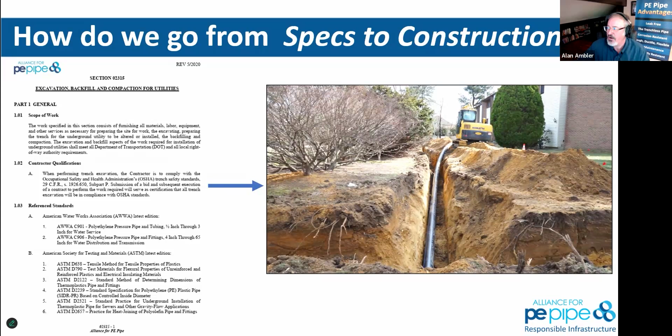And then once they push the pipe into the trench, they'll come back through and put backfill and compact that backfill in the appropriate lifts. A lift becomes less than 12 inches of backfill that can be compacted, because you can't compact typically more than that. So this is how we translate from the text all the way over into the video that you've seen in that scenario. There's a lot of things that we have to address.

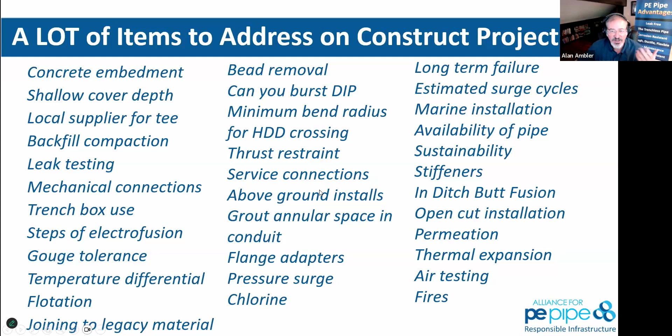Anyone on the call here that's done construction before knows that any number of these items can go potentially wrong in the field, or right, once we've done it long enough and know exactly how to do it in that manner. So how do we take all of the design considerations, the operational parameters of the pipe system that we're putting into place, and then know enough about all of these other things that we have to cover during construction? Again, at the beginning, I said we learn more from failure than we do by success. The second that we have a really big screw up that's going to cost a lot of money, we certainly will not forget about that particular compaction or that trench shoring condition. We'll talk about that a little bit later.

So here is flow design and ID matching. We often get compared to a thinner wall pipe because of our thick wall. This is a theoretically simplistic scenario in which we have one very long pipe, and we're looking at friction loss all across that. It doesn't happen that way in typical potable water distribution systems, collection systems, or force main pumping systems. There's lots of moving parts and pieces with friction losses around bends or corners or other things like that that we have to consider. Stephen?

Absolutely. Yeah, I think this is a really important topic because we keep seeing a lot of misleading information out there. And I think it's really important people understand the hydraulic models that go across this. It's so easy just to say, well, I need a pipe with a certain ID, end of story. Unfortunately, it's not that simple. There's a lot of different things that go into it, and every material needs to be looked at differently on those terms. So all we ask is that you properly look at the attributes of every material and design for their optimum benefits. It comes down to that simple. Let's not oversimplify it to where you're not giving a proper design based on every material property.

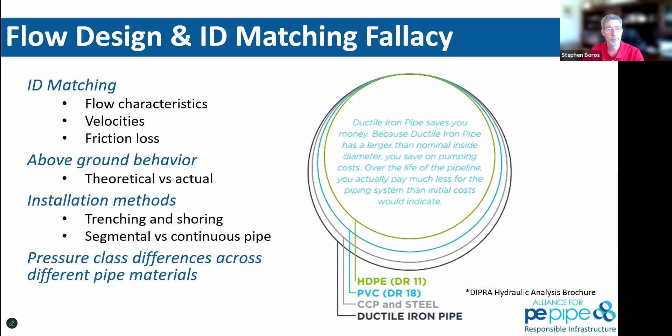That makes sense? Absolutely. Keep going, Steve. All right, we're going to try to answer this question. Keep going. Now I jumped into it now.

But for polyethylene, we have some advantages. Polyethylene is a very smooth interior surface, so you get very smooth flow. You don't get a lot of frictional losses, and it stays that way over the life of the system. That's a very important point. Not all materials do that. So you need to make sure you're sizing your system not just for flow now, but for what flow is going to be in 10, 20, 30, 40, maybe 50 years from now.

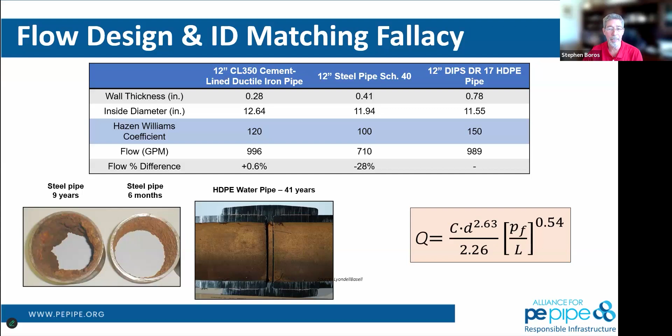Not many piping systems go down in volume need over the years. They always go up. And so how do you get more flow through an older pipe? Well, you got to increase velocity. What happens when you do that? A lot of things you got to take into account when you increase velocity in most of the older systems. With polyethylene, you can increase the velocity, we can get into some of that later on, and not have the other effects that come along with it, especially with an aging system.

So as Alan would say, oh, go ahead. No, you got it.

As Alan was saying, there's a lot of different things that go into hydraulic modeling. This is a typical table you will see out there, 24-inch, 10,000 feet, a little under 2 miles of pipe. Oh, just lost my screen. There we go. And this is what you might see some of the piping organizations put out there. And they say, here's an apples for apples comparison, but unfortunately, it's not always apples for apples. This is a snapshot in time. And there's a lot of other factors that go into it. If it was that simple, engineers wouldn't be doing their job. So there's more to it than just this on a hydraulic model.

The thing I want to bring up there, Stephen, if we can jump back to that slide real quick, Alan. People don't look at this. They look at this at the beginning of the project. But if you look at that C factor later on down the line with ductile iron pipe, steel, any of that stuff, that C factor starts going down over time, whereas polyethylene maintains that C factor through the entire life of that piping.

So as that buildup and tuberculation starts happening in there, your flow rate's going to go down. And that's why Stephen's saying that you have to design that system for 50 years out, because the tuberculation and the buildup inside that pipe is gonna take the ID of that pipe down, so you're gonna get less flow over time.

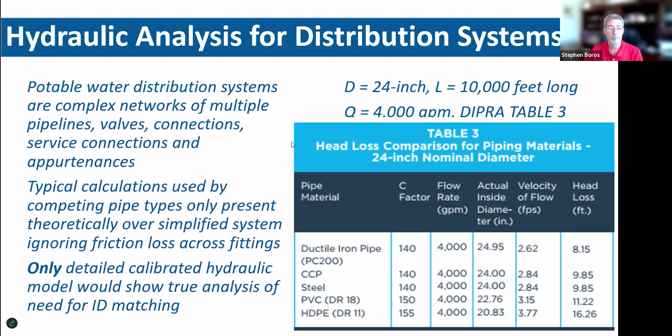And then, of course, we have pipe. We're a pipe manufacturer. We like pipe, but we know that pipe does not make a piping system. You need all the other components that go with it. So you got to have all the valves, the fittings, changing of angles in many cases. So you got to have the 11s, the 22.5s, 45s, 90s, the T's, the elbows, the Y's. They all add frictional forces to the system and are going to play as large or maybe even a larger part of the flow models of any piping system. So don't get stuck looking at just one part of it; make sure you're taking them all into account.

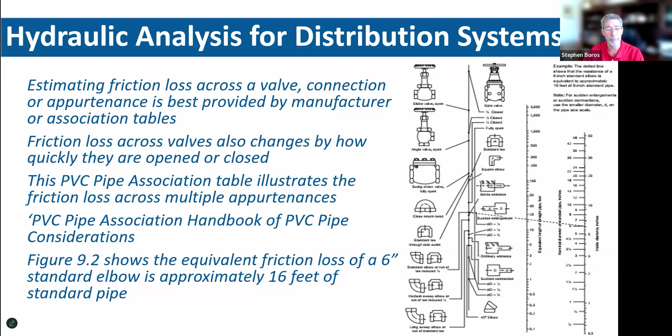So the one thing about polyethylene, though, is you look at these hydraulic models, and Alan's really good on this one here, showing the differences. With polyethylene, there's a lot of fittings you don't need that you need for other things. 11.25 and 22.5 degree bends are really very rarely needed in a polyethylene piping system because it has the flexibility to deflect around those if you have the proper amount of right of way. It does have a very tight bend radius compared to other products. So you can eliminate many of those, as we saw in some of the opening videos on these canal enclosures.

I remember talking with Mr. Toy on that earlier on, and he was very skeptical that he would be able to eliminate those fittings. But you saw here how successful he was. So that can't always be the case with other legacy materials. So again, it's not always a clear apples for apples comparison. Would you say that's true, Alan?

Absolutely. And a lot of these slides are trying to set up an ID matching argument that is only really answerable by a complicated hydraulic model that is included for the distribution systems. We've had a couple of questions with people coming out swinging hard on some of these questions, and I love it because it shows us the caliber of the audience that we're really talking to. A lot of times we learn just as much from you as we try to teach.

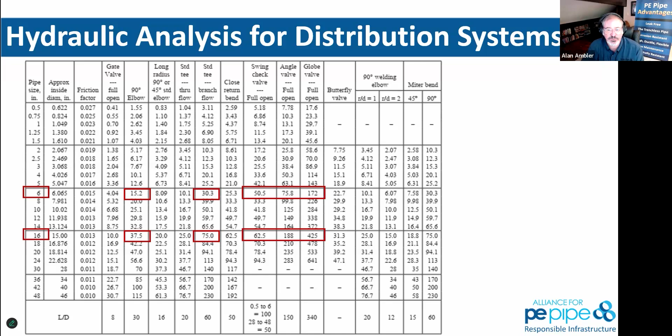We've got a really good question about the C factor over time and whether or not there is a slime layer within any type of pipe that builds up. And how do we translate from the paper, if the C factor of 150 came from a lab, as could be indicated by the question, what does it really mean in the field? We don't know that until we have an extensive hydraulic model. A couple of the next slides we'll go through to talk about some of that, and then I'll give a real world example of how much water flow comes through a fire hydrant, and is it ample enough to do fire protection.

So in complicated hydraulic models, you've seen some of those valves, the impact from that table. Here we look at each node. Each node becomes an actual service connection, an actual valve, an actual bend, something of that nature. And then we have to model the friction loss along that particular function. It's actually rather challenging to take a complicated distribution system, 215 miles, 115 miles, whatever it might be, and model each segment and node with the actual flow. Once that hydraulic model is put together, you also have to calibrate it, and you do that by taking measurements out in the field.

We had the blessing to interact live with St. Petersburg at a recent roadshow, and that crew loved high-density polyethylene for a lot of the benefits we've already talked about, but put a 6-inch pipe out to a fire hydrant, and one of their engineering staff said there's no way that would provide ample fire flow from the constricted ID. They took actual flow meter readings from the fire hydrant to prove that it was providing enough fire flow. And still, we're having some pushback from the engineers. So it is not as simple as one pipe ID, not as simple as an assumed C factor, as one of the questioners pointed out.

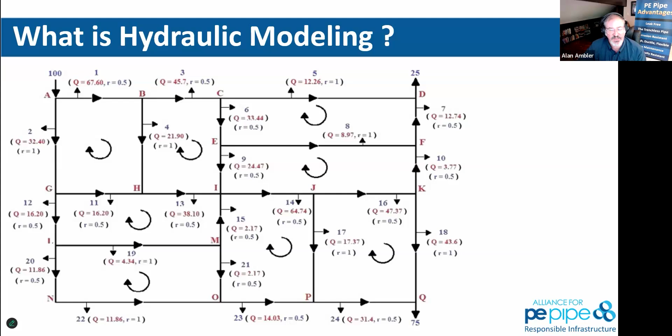Now, over time, some of the metallic pipes will corrode. They will have tuberculation within them. You'll also have some biomass and other things that may very well degrade that. But thermoplastics typically do not degrade in that fashion over time. Now, that's about all we're going to have for ID matching because there's a lot of other things involved here. So keep going, guys. You're doing great.

Yeah, there's a lot. So here I'll talk about this, Chris. We'll hit the engineering part and then the actual part. How about that? So you look at the handbook calculations. Calculating thermal expansion coefficients is very straightforward. They're all established. You have a certain delta T, you get a certain delta L, depending on the type of material. That's theoretical. As engineers, we have to look at what that potential might be, but we also know that in the field, it's going to be a whole lot less. This looks at totally unrestrained thermal expansion and instantaneous changes in the material, and we don't see that in real practice, especially in a buried piping system.

You rarely see anything like that. Any type of changes are going to be very slow, can occur over hours, if not days or weeks sometimes, depending on seasonal changes. And these theoretical changes that you calculate will never come to fruition. But again, you can't ignore them. You got to take a look at them and make sure they're taken into account. What do you think about that, Chris?

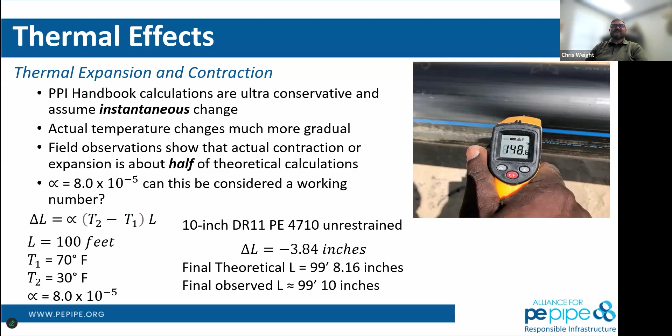Yeah, I mean, to simplify what Stephen just said, we just get into the 1-10-100 rule. If it's above ground, unrestrained, you're going to get 1 inch of expansion or contraction per 10-degree temperature change per 100 lineal feet of pipe. And that doesn't matter whether it's 2-inch pipe or whether it's 65-inch pipe. That calculation goes across the board. It's going to extend longitudinally and latitudinally.

So you need to look at all of that, especially if you're doing an above ground situation, doing tie-ins at the end of the line, so on and so forth. Make sure your weather conditions are there to go with that. And I'll let Stephen get into the modulus of elasticity here a little more because he talks about it better than I do. One of my favorite properties.

The modulus of elasticity for plastics. Took me a long time to understand this, because we're never really taught this in school, right? We're not taught how you model or look at properties of viscoelastic materials. Steel, concrete, wood, all those have very finite properties. So for polyethylene, the established elastic modulus is 150,000 PSI. That's under certain temperatures, certain conditions. So we use that as a basis for our models, such as our example here.

As Chris said, the size of the pipe really doesn't matter. It's going to be the same length of expansion or contraction. And that 150,000 modulus is a short-term modulus. That's something that happens over a couple of minutes. If it's a slower strain rate, if you will, or a slower reaction that takes place, slower delta T, that modulus is going to become lower, and the effect of that modulus is going to be reduced.

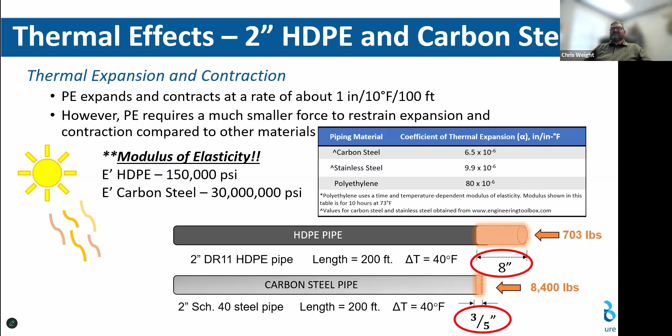Absolutely. Them numbers down there don't lie, and the amount of force that you get out of the carbon pipes compared to the thermoplastics is crazy. How easy it is to restrain polyethylene pipe. Correct.

So again, you look at the theory. The theory gives you a very simple equation: delta L equals the thermal expansion coefficient times delta T times your overall length. It is independent of size or DR, and the force will then be dependent on the cross-sectional area, of course. So the bigger pipe you have, the more force will be generated, as it would with any material.

Let's go from the 2-inch to the 10-inch example. 10-inch DR11 polyethylene pipe is going to want to move theoretically as much as 8 inches. In practice, it's going to be much less than that. But again, you only need 14,000 pounds of anchoring force to resist that. That can be done easily with an anchor block, with flex restraints and soils, things like that, versus almost 200,000 pounds of force that same steel pipe's going to generate. Can you imagine the size of anchor block it's going to take to resist that type of movement versus polyethylene? It's just not the same effect.

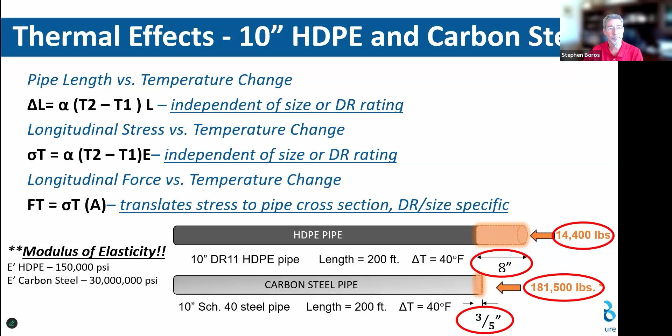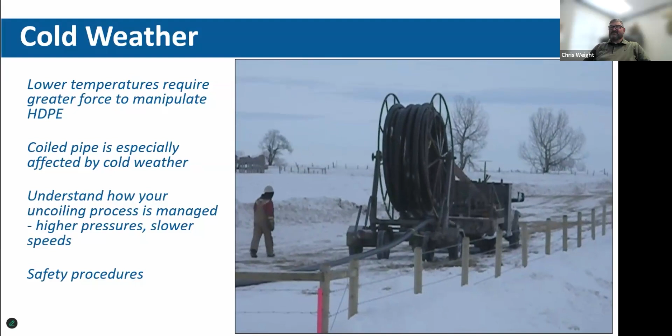All right, here's where I'll take over for Stephen here. These guys are pulling out 4-inch DR7 pipe. The thing with cold weather is coiled pipe especially gets affected by the cold weather. It can be dangerous if you're not careful. Don't stand anywhere where that can come around.

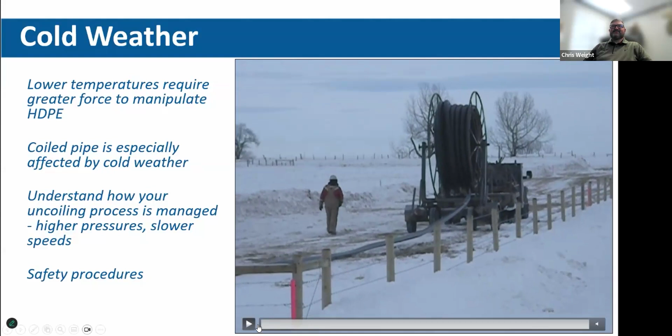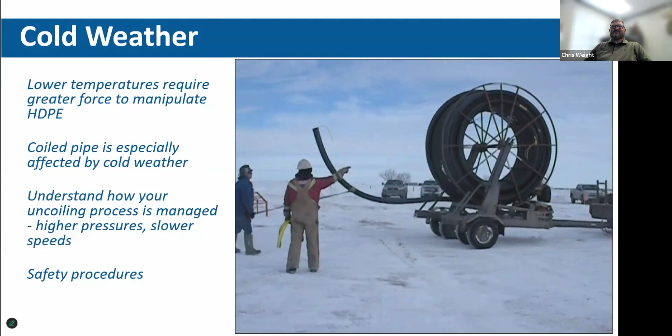The biggest thing that I'm going to point out in cold weather, and we're going to go through a few slides of cold weather here, is change the conditions, do not change your procedure. Understand what's going to go on. This pipe stores kinetic energy. You can see when they cut that first band, it just started popping down there. It'll roll out flat, but it is going to have some kinetic energy. So you've got to go nice and slow with it, get it strung out there, and it will lay and relax over time.

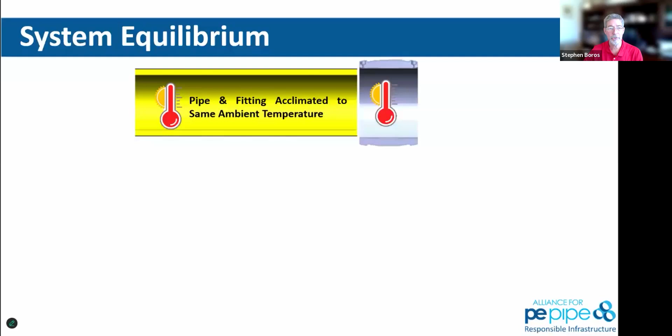Yeah, even in these cold conditions, the stiffness is going to be higher. Modulus is going to be higher. Go back to that term. But again, it will relax back to its manufactured shape, which is straight.

Yes. So be sure that you're equalizing the system and getting the system equilibrium correct. You want your pipe and your fittings to be the same ambient temperature. You don't want pipe higher than the fitting, you don't want the fitting higher than the pipe. Make sure, especially when you're fusing that stuff, that everything's the same. That way you get the proper melt bead on both sides. You're not getting too big of a melt bead on one side than the other. That's going to make your fusion process a lot easier.

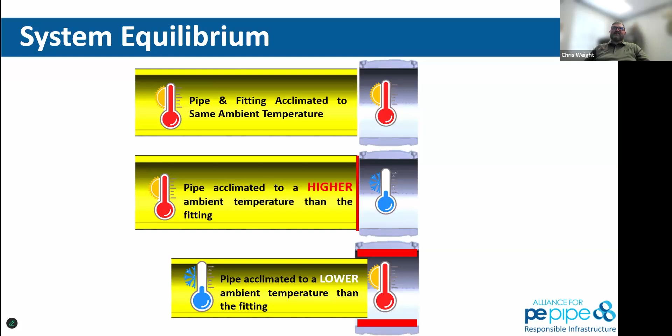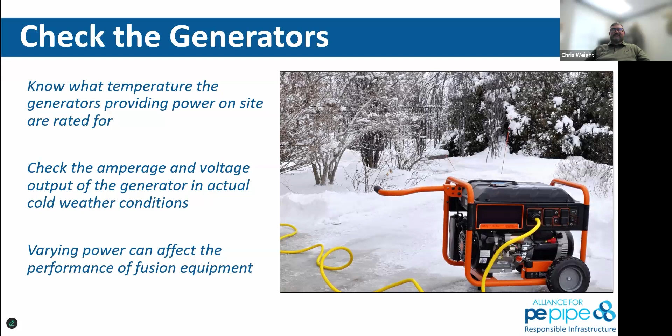Yeah, that's a good field pro tip right there. Generators, and you would be amazed how many people in the field underpower what they're doing. Cold weather affects it, elevation affects the generator output. Be sure you're checking your generator voltage output before you plug your fusion machine into it. Make sure you've got enough power coming from the generator to sufficiently supply your heater, your facer, the hydraulics and all of that on your fusion machine, because if you underpower those, you're not going to do anything besides tear the machine up over time.

And this is a key, especially in the field, using the right tool for the right job. On the left, we've got the poly porter stand where they've got rollers on it. They can prop the pipe up, get it in the machine, keep the alignment. They should be cleaning that pipe back 4 to 6 feet, keep any moisture out of there. Even the lower rollers on the right-hand side do the same thing, just to keep your pipe aligned. You're going to tent your areas, whatever you've got to do to make sure that everything is protected and you're not getting snow and ice and rain in there.

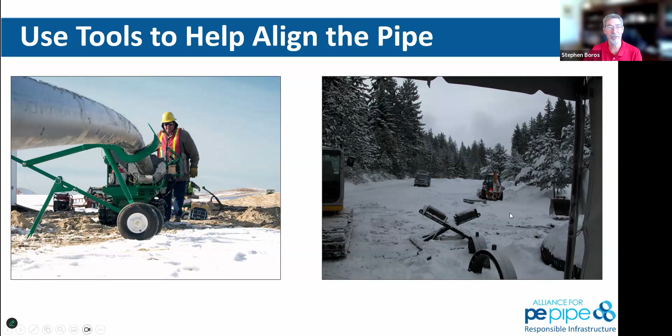But it's not just cold weather that you need to be doing this. You need to do this in hot weather too. Shield your fusion area; in windy areas, you've got to put tarps up, keep the dirt and the dust from blowing in, keep the sun off the pipe. Well, I've been on projects where I've seen the surface temperature of the pipe reaching 165 degrees. It's miserable for a fusion machine operator to stand there around a 450-degree heater plus 165-degree pipe. It doesn't say that in the textbook anywhere. It does not.

Stephen, you want to touch base on this? Yeah, so back to the thermal expansion contraction coefficient. This is mainly for above ground systems, which polyethylene is used for very frequently, whether it's a temporary line or a permanent line. The carbon black in there will protect it from UV degradation for 50 plus years, so that's not going to be an issue. That's why polyethylene is used above ground so much. But because it's black, it gets a little bit warmer than ambient conditions, as Chris said earlier.

So there are ways to constrain it. When you do get these temperature fluctuations, day to night, sun to shade, whatever it might be, there's a number of different ways to constrain that. You can constrain lateral deflection with expansion loops. You can do an anchored system; you can anchor it on both ends and it won't move. You can do a conventional expansion loop, as you see in the bottom figure; that'll work just fine.

The pictures you see here are very common. This is more of a field thing. We don't show that in our graphics, but in the field, throw a couple of Jersey barriers up there, throw some dirt over it every now and then, and that works as a very good restraining system in the field as well. The polyethylene could move on you through these cycles.

So as long as you have the proper right of way and you know where you want to keep the pipe from going, it's very easy to keep it from going in that direction. We're seeing right now, just from morning to afternoon in Wyoming, 40 to 50-degree temperature changes. It may be 25 in the morning and we're hitting 75, almost 80 degrees in the afternoon. So you're going to see a ton of this going on when these guys are laying their right of ways out, especially up north. You're not going to see it as much in the south, but you'll see it in the north where these guys are laying it out.

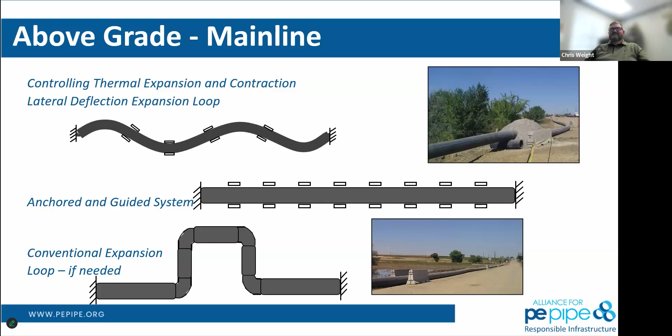So there are calculators for this. So let's say you want to know how many blocks do I need? How many places do I need restraints? Is it 50-foot intervals, 100-foot intervals? What's going to happen at these things? How much deflection will I get? The calculations are all there. All these can be done within the hdpeapp.com calculator, polyethylene pipe calculator, which takes it straight from the PPI handbook.

And you can see an example here. I mean, you kind of think, well, is that really going to deflect 48 inches? And yeah, it will, theoretically. Will it be that much in actuality? Probably not, but you're only looking at a strain of less than 0.5% over this. So it's not going to hurt the polyethylene at all, as long as you properly identify it and properly put your supports where they need to be to keep the pipe from moving one direction or the other during these cyclic thermal temperature cycles.

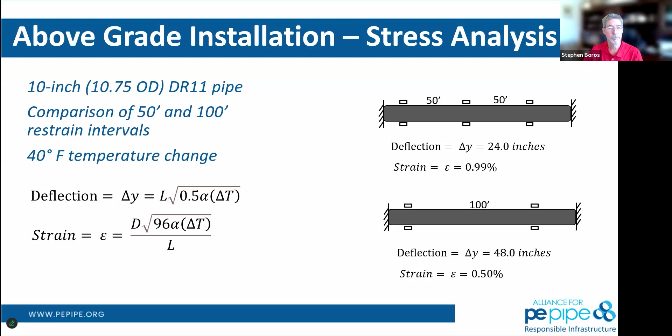Here's how Chris does it in the field. Absolutely. We'll just loop it around. We've generally got a right of way set up where we can string that pipe out. We can deal with the expansion and contraction. And a lot of times we're not gonna have more fused up than we can install in a day. So that makes a difference there too.

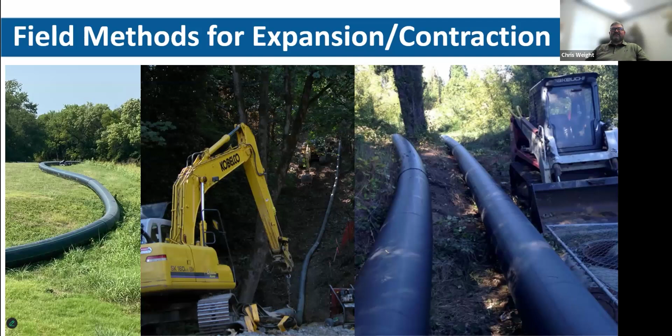So a lot of our locations, we can't keep open trench on, so we have to have the trenching closed every night. And so we get enough out there, but you'll see some of this snaking like the picture on the left out on the right of way while you're doing it throughout the day, especially with these 40 and 50 degree temperature swings.

I mean, yeah, these are some great examples of what people do above ground with polyethylene. I see a lot of engineers who aren't familiar with this get very concerned about it. They're like, wow, this is so much more expansion, contraction, movement than I'm used to working with. And they say, well, what's going to happen under these conditions? And you can see it's really not that unusual.

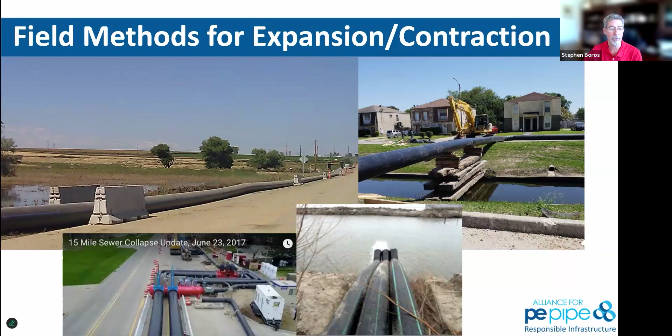In-ditch butt fusion, one of my favorite things to not do. But it's a needed necessity in what we got going on.

I was gonna say, I'll tell you all day long. Oh yeah, you could do that. Absolutely. Call up Chris. He could take care of that for you. Stephen will tell you you can do it. I will tell you we can do it, but it's not the easiest thing to do in the world. You can do it.

Yeah, absolutely. There's a lot of moving parts when it comes to an in-ditch butt fusion. You got to make sure you got the proper fusion machine. You got to make sure your trenching and shoring is right. Steve and I are gonna talk a lot about trenching and shoring today because it is very imperative that you have a proper trench based off your soil conditions. Whether you got a trench box, or if you don't have a trench box, it's got to be sloped out there. It's got to be benched.

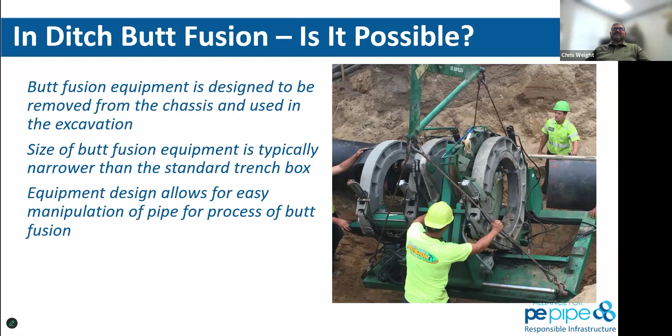However, you got to do it safely. We're getting too many calls nowadays of trench cave-ins, burying fusion equipment, burying people. Fusion equipment's replaceable, people are not. So make sure when you're doing in-ditch butt fusion that you're analyzing the situation. Stop and think about everything and make sure that you're setting the job up properly, because that's going to make the job in the end go way smoother.

Yeah, this is great because it goes to the constructability aspect, and that's true of any project. No matter what material you're using, you need to take a look at what do you have, what type of materials you're using, what type of equipment are you going to need or have on the job site, and how do I properly construct for that?

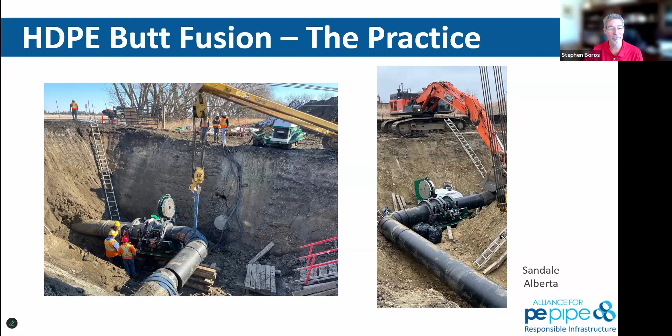This appears to be a gas project that we've got this picture on, but if this was a water project, they'll fuse these 500 foot sections up and they'll pre-test them and chlorinate them right there above the surface. That way they know what's going on. Everything's pressure tested and ready to go. The one on the right is just another little simple in-ditch fusion where they're going to do a tie in there.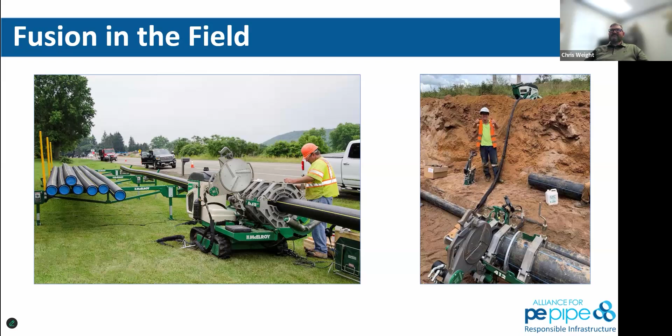So again, the question, in-ditch butt fusion, is it possible? It is 100% possible, given the proper condition. You have to make sure that you have enough room. That picture on the left where they've got trench boxes in there, trench boxes make it more difficult, but it makes it obtainable. You can't just throw a trench box in anywhere. You've got to set everything up in the width of the trench box to be able to get that fusion machine down in there. If you can't get that jaw set down in there and swing the heater and the facer out of the way properly, it's going to create a nightmare in the end and a very unsafe work situation.

So we've seen several images here, fella. Sorry to interject there, Stephen.

Yep, you're good. All of this equipment is designed to come off of the chassis and then come down into the excavation. All of the trench shoring and various levels, now we're getting into increased complexity based on depth and based on width and things like that. They're designed not for the pipe, but to be able to give safe access for the people that are working around that excavation. And you'll see a lot of that through this. If we were just looking at pipe, you wouldn't have to have that wide of a ditch. In an earlier video, we just showed someone rolling a pipe over into a very narrow ditch through that process.

But all of these that we're showing you are also safe for the people that are excavating it. We don't typically like to delve into OSHA that much, but we do really get into a lot of: can we butt fuse in the excavation? And here we're walking through the whole steps. And like everything that we do, we've got to make sure that it's safe, and then also that we're doing it properly.

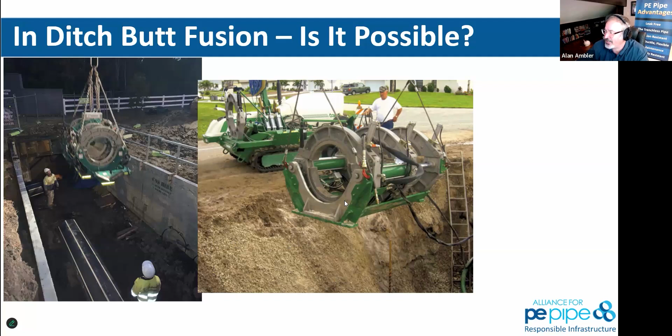There's a lot of very bright people that have thought about the design of the equipment. And there's a lot of very bright people like Chris on that side that have figured out how to actually do that in the field to make what Stephen wants happen, or the other way. So definitely keep that going, guys. Absolutely.

Yeah, I think these are great examples because when you're designing these systems and you have a narrow right of way, you're saying, oh, polyethylene won't work because I can't get that fusion machine down in the ditch. The whole fusion machine doesn't have to go in the ditch. When Chris is there, he'll say, man, it's really nice when it does, but they are designed segmented that way.

So the collets and the gripping portion, heating portion can be lowered in separately. So when you're looking at the size that's needed, it's not the whole size of the fusion machine that has to go in there. It's just a portion of it. So just make sure that's taken into account when you're doing your construction aspect of the project.

Yeah, the picture of that fusion machine that's on the slide right now, you can break that down into a 3-jaw system where that's all you have in there, and it's just the width from the back of the jaw to the front of the jaw and the controls. That heater and that facer can be set down with an excavator or a piece of equipment, lowered into the machine and taken back up out of the machine, and it can actually stay up out of the trench if need be.

So if you've got questions on that, you can always reach out to us to get some dimensions of a fusion machine and actually how small you can be. But there's a lot of great resources out there. McElroy's website is amazing for stuff like that. Yeah, I just want to make sure we pointed that out because I get those questions a lot.

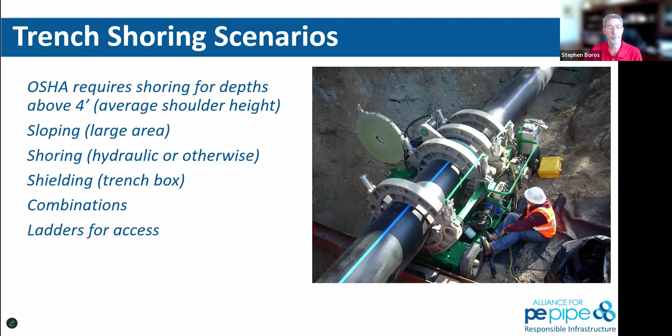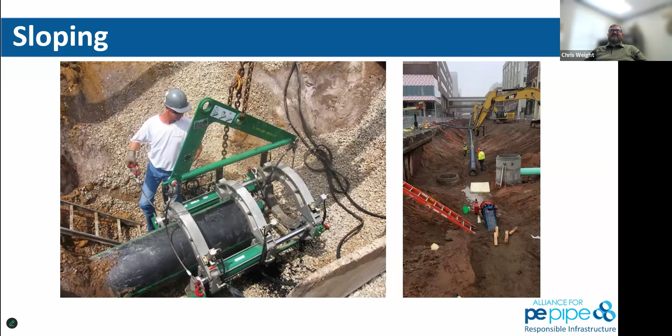So I'm going to let Stephen talk about the hydraulic trench shoring here, because I'm not real familiar with the hydraulic side, because I've never had to do that one. I can also help some here too. Yeah, so jump in there, Alan. Yeah, you bet. So these slides are set up to walk you through from a simple solution, which is the sloping, all the way up through the much more complicated, expensive slide rail system. For each of these excavations, the cost of excavation also jumps up in similar manner.

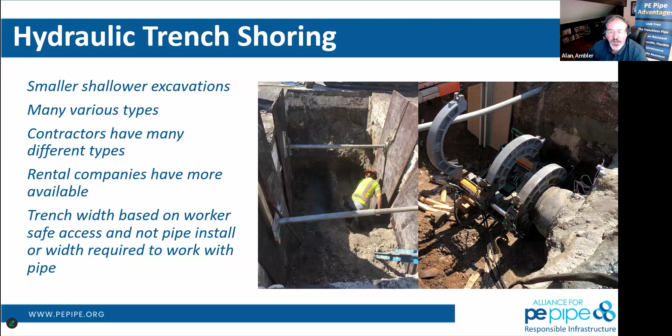So these hydraulic trench shoring systems basically operate against a plate, and then whoever's operating it pushes out a hydraulic piece in order to be able to expand that and to try to keep a simple and quick excavation from moving in that manner as well.

Shielding is the next level up as we go through this. This could be a trench box that's all set up, and you simply move that into the excavation and put it down. Again, all of these are not for the pipe. They're all for safe access of the people working on the pipe, and their widths are determined in that manner to be able to provide us that. A lot of contractors will have these on site or be renting any number of things.

So one of the big things about polyethylene that Chris talked about was very long lengths. A lot of times we get segmental contractors that look at HDPE pipe and go, oh, but I can only install this amount at one time. And like, no, rent another trench box, rent yet another trench box. And that way you open it all up, you put in the high productivity of that 500 feet at one time, and then you cover it back up in order to be able to increase your productivity. You just use more rented trench boxes in that manner.

But the point that I want to touch base on that with you, Alan, is people look at that and they're like, well, I need 500 feet of trench box. You don't need 500 feet of trench box. You need enough trench box to keep that trench safe, just in case somebody has to get down in that trench. So it may only be 1, 2, maybe 3 trench boxes. Obviously, the deeper it goes, the more expensive the trench boxes get, and the engineering and stuff like that. But that's a thing to keep in mind.

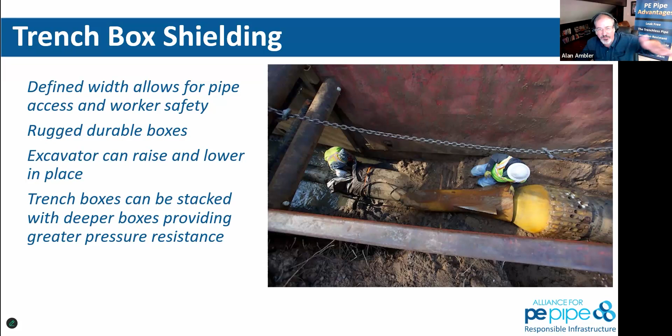You can open up all 500 feet of ditch, but you only have to keep enough of it safe at that point for the person to get down into that area to do what they have to do and then get back out. So you don't need 500 feet of trench boxes. Absolutely. Correct. The allowable bending radius of HDPE will certainly allow you to move that pipe from above ground into place in a much easier fashion as well as we go through it.

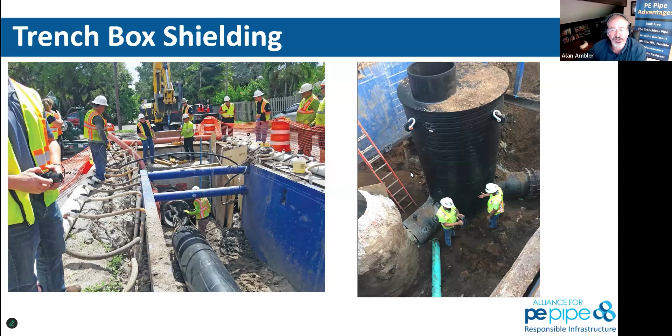So I'll just kind of push through a couple more examples of this as we're looking at it. And this picture on the left shows a dewatering system as well through that process. So in high groundwater areas, we're going to have to make sure we lower that groundwater to be able to have a safe trench through that excavation process. And again, as Chris weighed in there, pun intended, with your last name there, Chris, you can easily put whatever you need in there and then move that trench box to the next spot as we're going through. And even with deep excavations, like you'll see through the manhole on the right here, there are trench systems available for you to be able to go through.

Moving into a more expensive version for deeper excavations, now we have a slide rail system. Now, our dewatering system only works down to about 15 or 16 feet in most scenarios. You'd have to have a staged dewatering system to get even deeper than that if we have that much groundwater present and we need the bottom of that excavation to go through. But still, that's independent of the machines. That's independent of the HDPE pipe. Now we're talking about construction logistics that sometimes we think through or sometimes we don't as that design engineer moves on and Chris takes over the project to actually construct it.

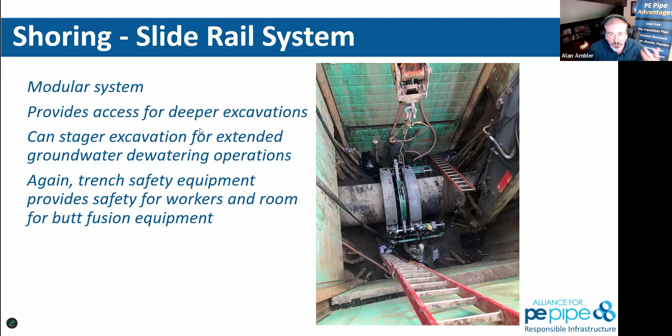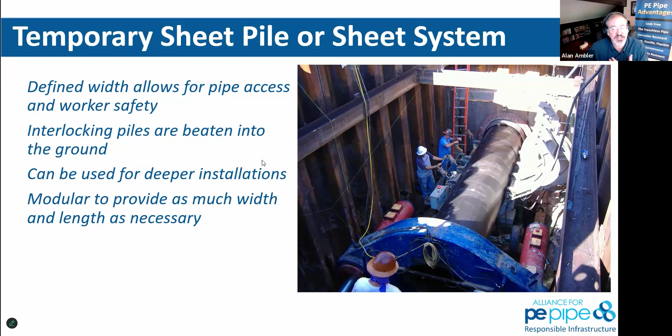Here's a much more costly system for trench shoring, and that's a temporary sheet pile or a sheet system. And these simply are beat into the ground to provide that safe access for us as we go through. We often talk about a compression fit slip lining or a pipe bursting process through the installation of a trenchless method of HDPE, and that soil interface from that machinery that we're using either for pipe bursting or compression fit slip lining would push against a sheet pile like this. And then that sheet pile would provide that reinforcement to be able to resist the force from moving in that direction. But you could see also from the picture that they're really providing protection for the employees to access the actual work location.

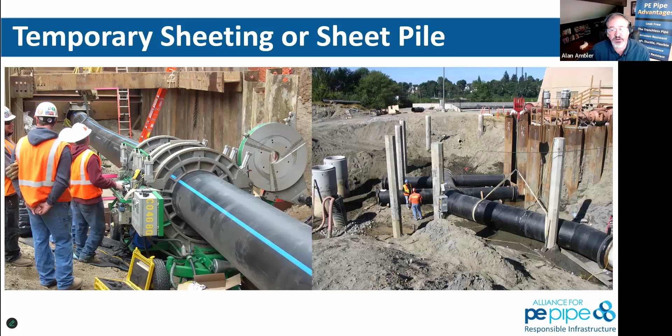These vary based upon how much work area is actually there, what needs to be protected, and can work in conjunction with other methods as well. As you'll see on the right here, there's a lot going on in that picture with sheet pile, sloping, and a few other things of that manner. So here's a little bit on open cut installation. So essentially, flexible pipes are considered to be ductile iron, PVC, and HDPE.

Those are all installed in the same manner. They're all considered to be flexible, as they're working with the soil that surrounds that pipe to distribute the force loads to the soil surrounding it. Rigid pipes are cast iron, asbestos, VCP. They're expected for that hoop strength to be strong enough to take any of the external loading and just go straight down to the bottom.

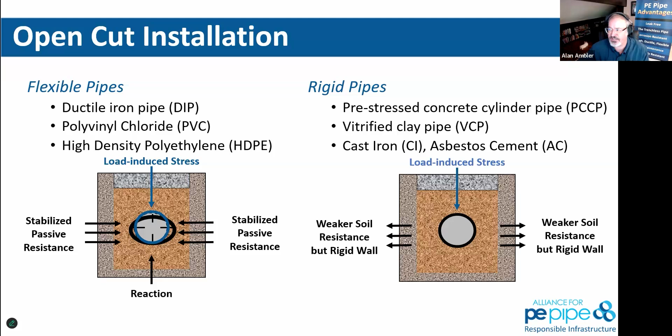This is a great slide. I like that slide, Alan, because I get this question a lot: people feel like polyethylene won't be able to withstand soil forces, and it's the exact same principles, exact same calculations as you would have for ductile iron or PVC that work for polyethylene. Even with live loads, if you have 2 or even 3 feet of soil cover, your live loads become very minimal, and you don't have to worry about it.

And the other side is, if you have 25 feet deep burials, again, with proper soil compaction and soil support, you don't have to worry about those either. So there's a broad range where you can use polyethylene in these situations. Don't be worried about it. All the calculations are there. Look at deflections. Because it is flexible, polyethylene doesn't have the strain limitations that some other materials would have before they become damaged or compromised. So again, a pretty broad range of installation conditions where you don't have to worry about it whatsoever.

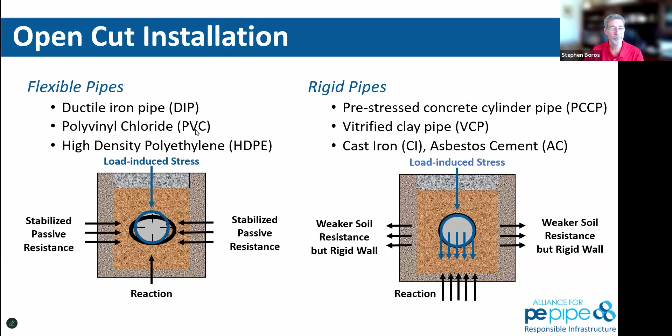Now, the next slide, this is one of my favorite things. I absolutely hate comparing polyethylene to silly putty. It's really not the same thing, but it does give a good comparison of what we're talking about when we use the term viscoelastic. We've all played with a piece of silly putty over our lifetimes, maybe not so much now. In my day, you did. You know that it's strain rate dependent, right?

So you take a piece of silly putty and you stretch it slowly. It just goes and goes and deforms, and its elongation is huge. Conversely, you do a very high strain rate, and it doesn't stretch much at all before it breaks. Very little deformation. That's the classical explanation of viscoelastic. Its different properties are strain rate dependent. All of this has been defined for polyethylene. Very well understood, very well known.

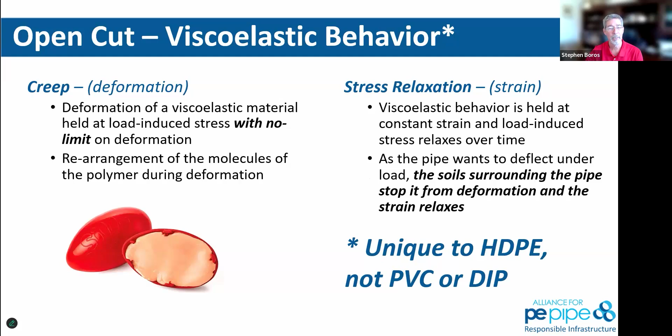All the design calculations we use, whether it's long-term strength, short-term strength, surge pressure, cyclic fatigue, all of that has been factored into how this performs in that unique manner. Sometimes we can take advantage of it. Sometimes we have to treat it as a negative and still account for it and properly design with it, and it works just fine.

As the opener for the video told us, one of the users of this pipe material essentially just bends it in the field. And that force that's loaded, if it's deforming, it's going to creep. If it stays within the allowable bending radius, that's just normal creep and no deformation, which is what we're showing here. By the time we've put that into the soil and allowed it to do the stress relaxation, that's going to be a perfectly happy pipe.

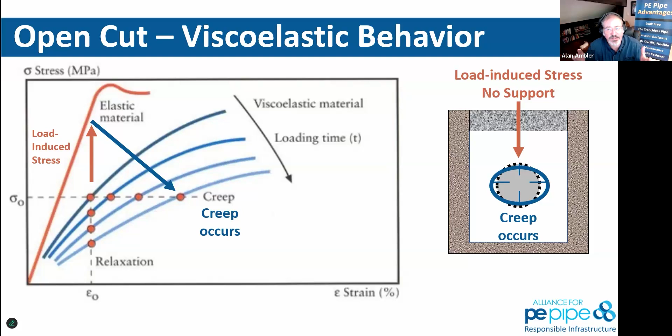When we're doing it in an open cut like this, and we have that soil that supports the pipe, it becomes a happy pipe. It's rested, it's relaxed, it's in the natural shape it wants to be in. But it does take force to put it into the bend radius that we allow for that pipeline. So this is just translating from that viscoelastic behavior that Stephen talked about, and we may very well just remove silly putty from the presentation.

I like the term happy pipe. We like happy pipe.

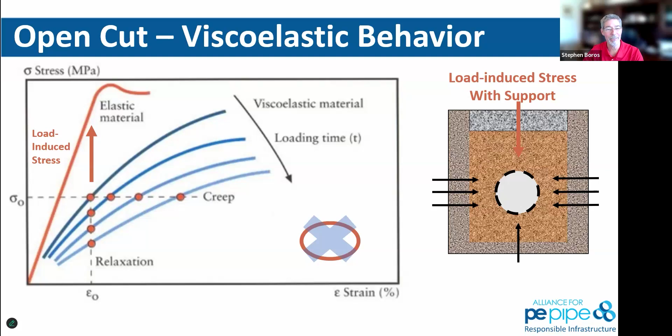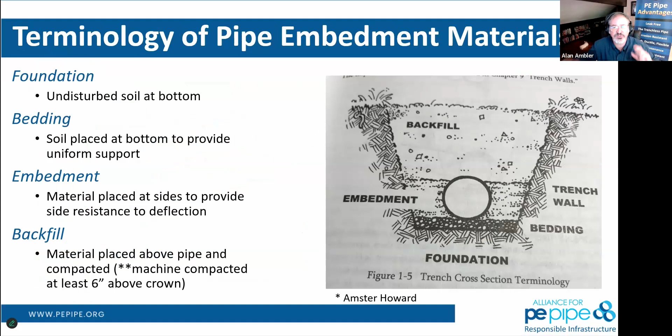So here's some terminology of the pipe embedment materials. As I said earlier in the presentation, all of these things are involved even in the trenches, even in the complicated slide rail systems you saw. So we're providing that protection for the pipe. We've had some questions about concrete above it, things like that. Everything you would do to protect another pipe system, you can do for HDPE through this process. We do have design windows and tables for you.

This came from M55, I believe, first version, to give us a generic design window of DR7 to 21, that you can have a max 25-foot cover according to this design window, 2 feet with no H20 loading. That's a box truck like the Penske, or 3 feet with that H20 loading. Just because this is the design window doesn't mean that something can't be done outside of that design window itself. We just don't have to do any calculations if this is what we're looking at.

So that's one of the simple things about installing HDPE in these normal parameters as we go through. And you're right. I mean, that's going to cover probably 90% of your installation conditions that you're going to have with a water pipe, whether it's water transmission, force mains, sewer distribution, whatever it might be. These conditions are going to cover 90% of the time. But if you're outside of this, then there are ways to design for that as well.

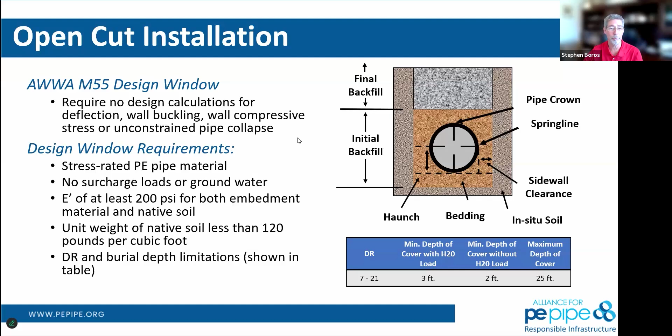But in other words, there's nothing unique you have to do. Same soil compaction, same backfill, same everything else is going to work for polyethylene, just like it does any other flexible pipe. And if you don't have a copy of the M55 manual, I would highly recommend you get one. And you should carry it around with you about everywhere, because somebody can ask a question and I guarantee you will find it in the M55 manual.

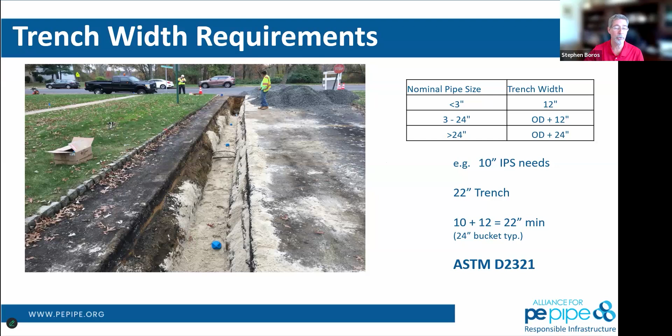Very comprehensive, agreed. So you can see how narrow the trenches can be with polyethylene. They don't have to be extremely wide. With even over 24-inch pipe, you're looking at the OD plus another 24 inches, that gives you another foot on each side of the pipe, just to make sure you can get proper backfill and compaction, as Alan talked about earlier, with the different lifts and compaction. But you don't need a wide trench for polyethylene. There's nothing unique or special about it. In fact, many times you can use a much more narrow trench with polyethylene and be very successful.

Dual trench is not uncommon. You can see 2 dual, I think these are probably 24-inch lines, probably for a force main, if I was to guess, or water transmission. And then in the picture in the center, you can see you can have complicated trench shapes. We've seen several examples of that already, where you can just bend the pipe into place or dig the trench the way you need to do it, fuse up the pipe, as Chris talked about earlier, and just drop it into place and bend it into that S-curve without a single fitting that's needed, and then just go back and do the compaction.

The thing that will change on that dual lay, the only time I've seen anything change on a dual lay is when the EPA gets involved and they want a certain distance between, if it's a sanitary sewer and a drinking water or potable water system, something to that effect. You may have to get a little wider trench than what you're seeing in this picture. Correct. Yeah, you do have local regulations like that.

Now, we have seen situations where some allowances are given for that with polyethylene because it is a fully fused system that has no joints. So because of that, there are some municipalities or states that will give an allowance to minimize that separation that's needed because you don't have to worry about leaky joints with a polyethylene system. That brings up a great point because we just did a subdivision and they originally told us we had to have 12 feet between sanitary sewer and potable water. We actually got it down to where we could get as close as 6 feet, and they were perfectly comfortable with that after we showed the details.

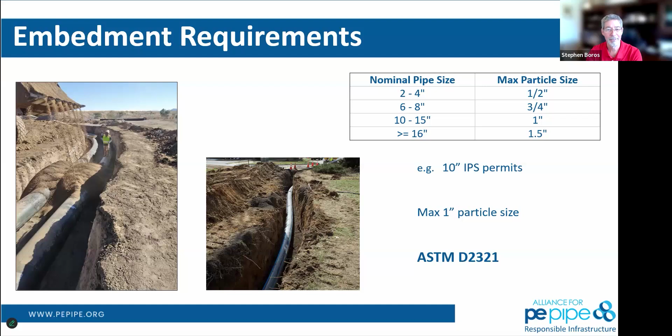Yeah, let's get into surge just a little bit. Well, we'll talk about this.

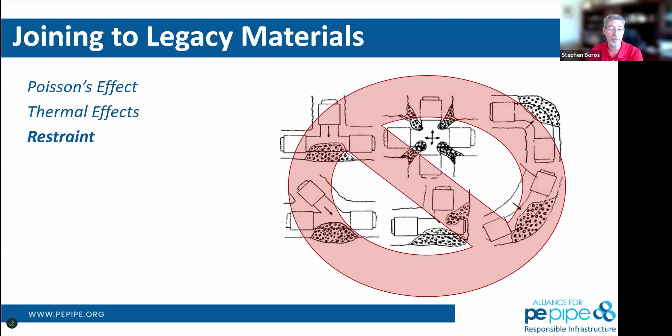So, do you need, and I'll use this very carefully, do you need restraints? And then whether you need thrust restraints with polyethylene? And the answer is typically you do not, because it's a fused system that's fully restrained joints. You don't have to worry about pushing those joints apart with change of direction of flow as you would other materials. So 99% of the time, thrust blocks are not needed. Anchor blocks, yes. Thrust blocks, no.

And we talked about ways you can anchor it. So Chris will put these in the ground in different ways and different combinations, but the theory is all there. The design is all there within the handbooks, that you can anchor it with different systems. You can have electrofusion flex restraints that are fused around the circumference of the pipe. Each flex restraint is what, Chris? Maybe I think it's 5,000 to 7,000 pounds of shear force.

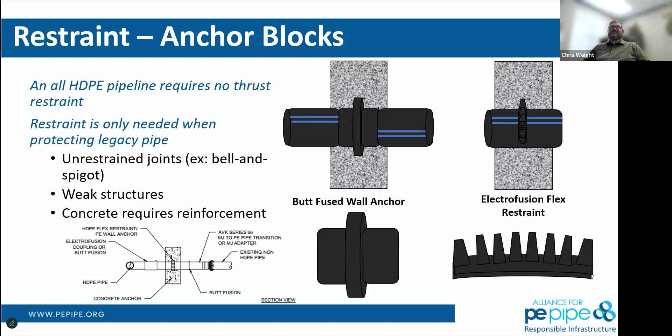But that is an engineered question too, based off of the manufacturer of the flex restraint. They will give you some engineering side to it, but it's always good to consult with an engineer like Stephen or Alan to figure out exactly how many of those you need for your system to keep anything from moving. Correct.

Here's a great example. So you got polyethylene hooked up to a valve, which then transitions to an older PVC system. And you can see all they're doing is constructing an anchor block right there just to keep anything from moving. If it does, you can see that the angle that polyethylene's at and the way it's restrained, that's going to provide the majority of the restraint that's needed.

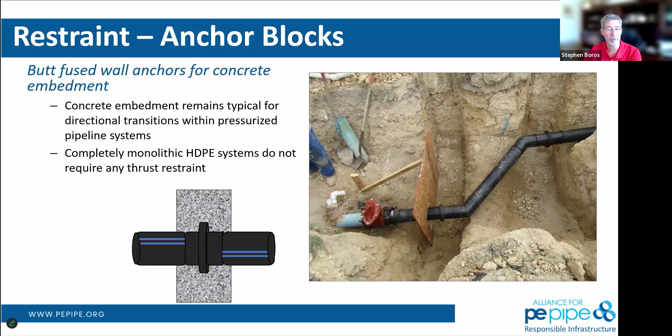But just as an extra belt and suspenders approach, for conservatism, you can then throw an anchor block in there with the proper rebar and design and cross-sectional area of that as well. Very simple done.

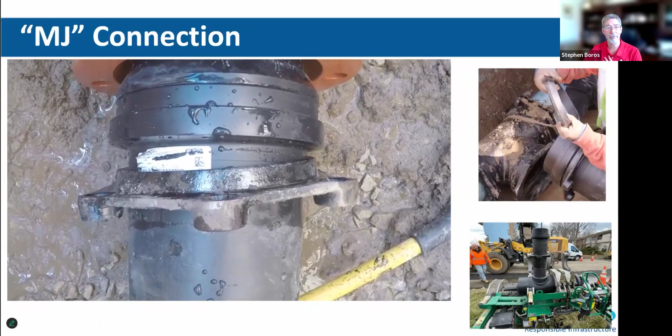MJ adapters, you gotta love them. These are great attributes. Now I'll let Chris talk about the actual field use of them, but there are fused-on MJ adapters, which is what we're seeing here. My personal recommendation is that's what I would go with. There are fully mechanical MJs that you can use on polyethylene, just as you would ductile iron or PVC. Personally, that's not my first choice, and I think Chris could probably give some more real world examples about which ones he would rather see being called out and specified.

Well, my question to everybody is, why are you going to put in a completely leak-free system and then not put a butt fused MJ adapter on the end of it? Why would you put a mechanical connection? So that's the first question of the whole situation. We install hundreds and hundreds of these MJ adapters throughout the years.

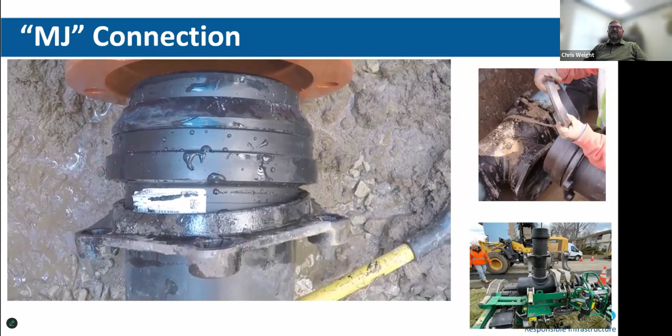And what you have there is, you got your gland on there that's fixing to go into that valve with the ring. It bolts up just like a standard mechanical joint, but it's got that hub flange on there that ring slides up against, and it seals down just like you would with a Megalug on a piece of PVC going into that to restrain it. It's an amazing system, and Harvey Svetlik was kind of the wheelhouse behind that, from what I understand in all my years in the polyethylene business.

Yep. These go by the hundreds. In all honesty, when you're doing a municipal water system, if you can talk them into MJ adapters rather than just a mechanical Megalug system or something to that effect to ductile iron fittings, you're going to save yourself a lot of time and energy in the end.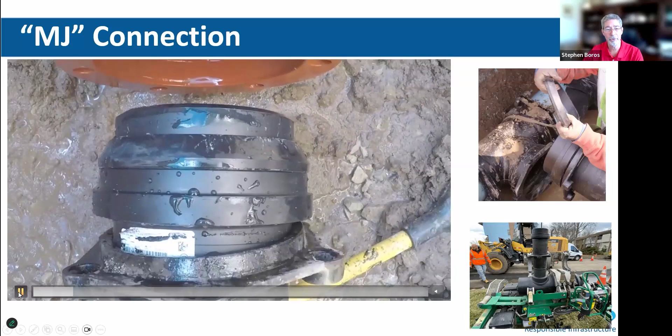Yeah, okay, theoretically they'll work. A good mega lug up to about 12-inch on polyethylene, I'm just giving you some experience with that. No problem. They can work fine. If that's what you got, that's what you need to use. It works extremely well. Even larger diameter sizes can work fine. There's just a little more nuances you're going to need to get it past. But you can do it, but, like Chris said, you want to save yourself some headaches in the field.

Use the MJ adapter that you butt fuse on, and then with the ring and bolts like you have here. It comes as a kit, very easy to order, very easy to specify, and to get it all in the field. Well, and they make them two ways. I mean, this is great to connect to your legacy material, not just the valves. So you can connect to your legacy material with this.

They make them in a male and female configuration, so you can either go to the bell end of legacy material, or you can go to the spigot end of legacy material. I get calls weekly wanting to know, hey, how do we connect to this? And 95% of the time it's an MJ adapter.

Okay, so just a little bit of additional commentary on the two different types of fittings. An MJ adapter, as you saw there, is a robust molded fitting that we fuse right onto the side of the pipe as well, but it directly goes into whatever we're connecting it to. And then across these bolts, any type of movement or any type of force that connection is going to see transmits laterally across that.

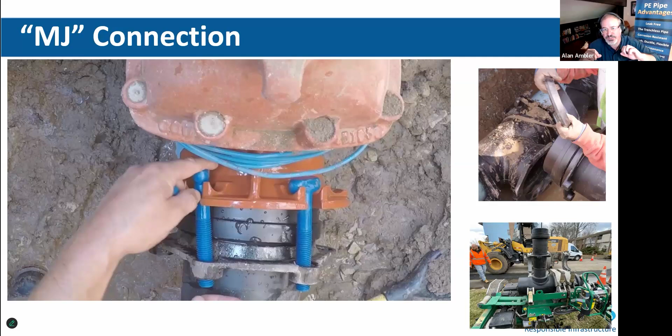So a mega lug is different in the fact that we are now tightening something into the sides of that HDPE or that fitting that we have, and it has to tighten into a stainless steel insert to be able to stop that creep from happening with the pipe itself. So the design of the MJ adapter is different based on who's making them. Some of them have stainless steel inserts, some of them don't, but that's up to the manufacturer. But those are the two primary differences as to what happens for the direction of the forces between these two fittings. And I'm so glad you guys got into that as well.

So we've got another 10 minutes for us here. If you want to talk about some tools that you could use for anchor block design. Yeah, I mean, just jump in there real quick. So there was a new study done by the Plastics Pipe Institute about, I guess, 3 or 4 years ago now, which looked at what is the standard anchor block sizing that's needed. And it turned out the older guidance on that was extremely conservative. I mean, it gave you this anchor block that was just prohibitively large sometimes.

So Cornell University and some professors there did some studies using soil friction, taking that into account with movement, and then looking at, all right, what's the maximum amount of movement and force we're likely to see, and then resizing those anchor blocks to be more reasonable. That's a new publication that's been out there now for a few years. It is ingrained within the hdpeapp.com software I talked about before. So you can go in there and get some good information on the size of anchor blocks that's going to be needed. And then Chris, you just give it to him and he'll tell you how to install it in the field.

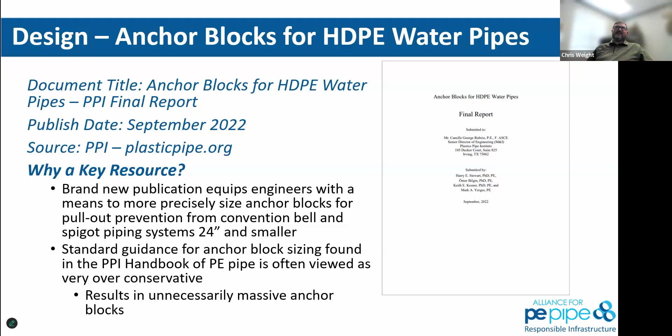Absolutely. We just had a good question come in, Stephen. It says, can MJ adapters be molded into different sizes, reducers if you're connecting to PVC or ductile iron pipe that has a different OD? So most of the MJ adapters, the hubs of them are designed to go into ductile iron sized pipe. They do make them in IPS and they make them in ductile iron pipe size. So you can get them either direction, and you can also throw a reducer on there if you're going from, say, a 10-inch to an 8-inch or a 6-inch. You can get them that way. I just wanted to throw that out there instead of typing a big long answer. Yeah, you get that question a lot too. Yeah, the transition between the two is very easily done.

But every thermoplastic material that's used in a pressure pipe application, and I'm talking about polyethylene, PVC, CPVC, cross-linked polyethylene, polyamide or nylon, all those go through this type of analysis, an extremely long-term analysis to take the factors of creep into account, strain capability, and stress capability of the material, not just short term, but long term, to say, all right, what is the long term strength capability of this product when I make a pipe, a pressure vessel, out of it? How do I pressure rate this thing? So I'm not going to have to worry about pressure over the long term.

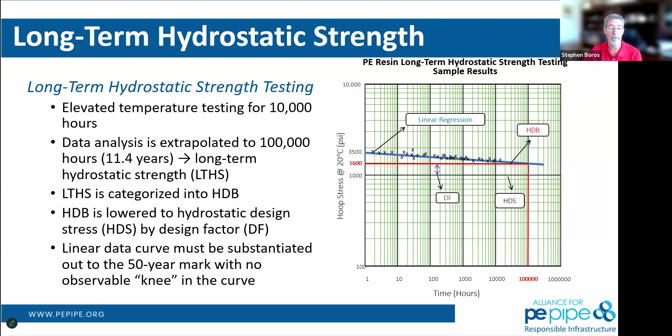Polyethylene, as we talked about earlier, all these properties are taken into account. There's multiple levels of margins of safety built into this at several different steps. So when we say that polyethylene has a 200 psi operating pressure allowance, there's a lot of safety factor already built in there. You can actually operate that system at 200 psi all day, every day in a gas or a liquid environment. Not all materials are that way, though. You have to take different things into account. But for polyethylene, when it says 200 psi, PC 200 psi, it's 200 psi working pressure all day, every day. And we'll get into why that's important with the surge.

Here's the equations you look at. So because of DR, we use a DR rating for this, dimensional ratio. It's a ratio of OD to wall thickness, or minimum manufactured wall thickness. So there's conservatism in there. And what's nice about that is it doesn't matter how large the pipe is, from 1-inch pipe to 65-inch pipe, that DR has that pressure rating. So a DR 17, as you see in the chart there, no matter how big the pipe is, will always have a PC 125 or a 125 psi operating pressure. DR 11, 200 psi.

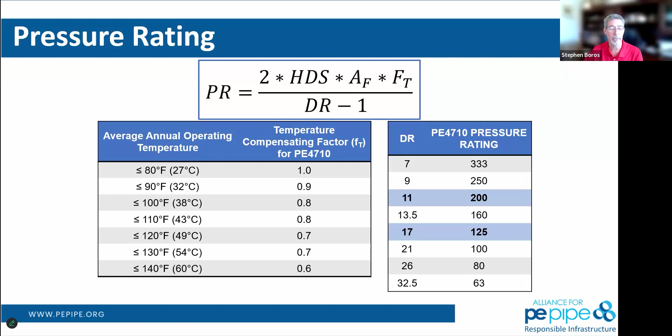It is temperature dependent. So everything's designed for polyethylene to operate at 80 degrees or less as our standard operating conditions. If it's above 80 degrees on a continuous basis, not just like a little spike here and there for an hour or two and then it goes away, there are ways to reduce that pressure rating in a proper fashion all the way up to 140 degrees Fahrenheit of continuous operating temperature to apply that to the maximum operating pressure as you see in the table to the right there. So all these factors are there.

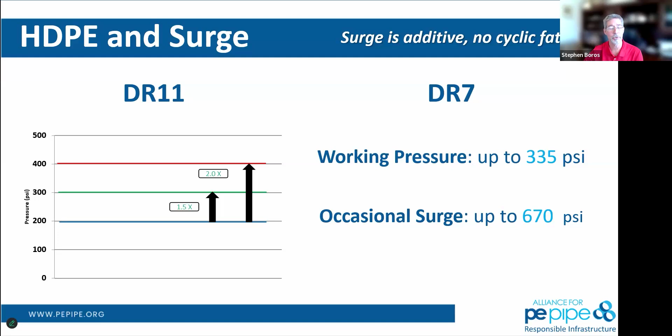All right, so what doesn't long-term strength take into account? It doesn't take surge into account. When we're doing the long-term stress regression, it's literally a pressure vessel. It's a pressurized piece of pipe. It's static, and we see how much stress it can take over a certain period of time before it creeps and ruptures. So we got all that figured out for every thermoplastic material. But when you're flowing it, that's the whole purpose of a pipe. You don't want it to sit there and just hold fluid. It's a tank. When you're moving fluid, then you got a whole other energy regime you have to deal with. That moving column of fluid is now going to generate energy depending on how fast it's moving.

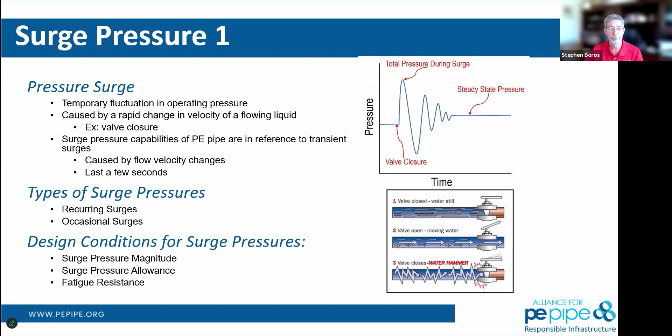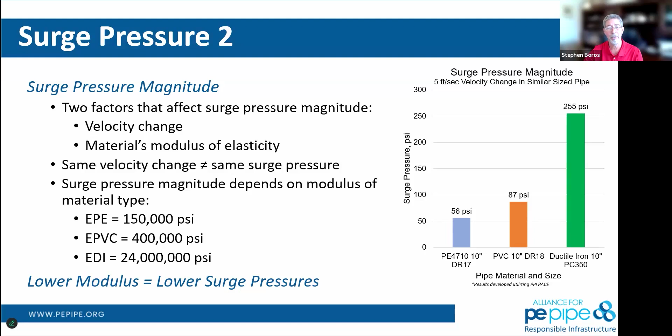For example, DR17 polyethylene. It has a 125 psi operating pressure, but at 5 feet per second, that's going to generate a potential 56 psi in surge. Because the moduli of the materials are different, that PVC, you're going to see a surge of 87 psi happen. And in ductile iron, you're going to see that same 5 feet per second velocity change generate 255 additional pounds of pressure over and above the working pressure rating. So what's that mean in a system? We talked about pressure class. The first columns on the left of this bar chart.

So you can see now, even though you start with different pressure classes, they design as the same pressure class in the long term when you have flow going on. You got to take that into account, or you're not going to get a proper design. Is that right, Alan? Absolutely. 55 cycles per day. That's that pump on, pump off, that type of thing. The occasional was 5 or 6, and that's all pumps on, all pumps off, or a firefighting event or something like that.

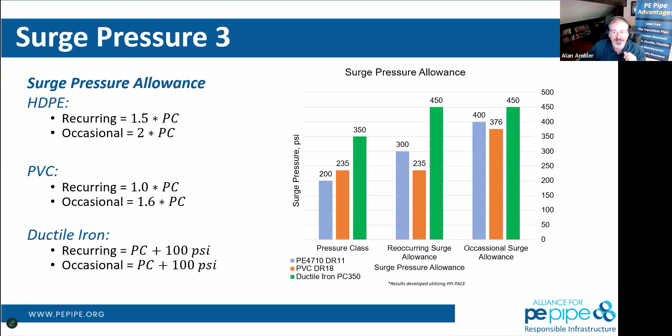I didn't even have to be here. I mean, you guys could just run the whole thing. It's fantastic. Love it.

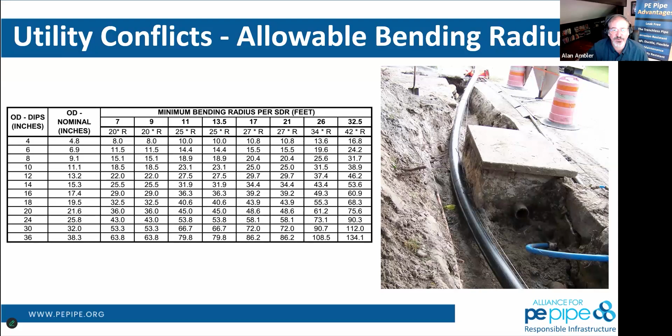Here's some examples of that bending radius. I love this photo on the right, and this will be one of the last things that we show. Of course, there's Dan Landy and Peter Dyke, who wasn't here to join us in that photograph. But this is a slip lining project in Tucson, and we are avoiding multiple bends within this line and allowing that viscoelastic behavior of HDPE to really shine.

So we are forcibly pulling that through an existing pipe, putting it through a natural bend. We are not deforming it beyond yield to the point where we're breaking the material itself, but we are taking advantage of that viscoelastic behavior to make our lives easier in construction. How is this written in the specification and translated into the field? Those people that understand the properties of HDPE and can share these types of things with you understand how that's going to work between those two things. It's not always as easy as A is equal to this modified B, but this is effectively what using that HDPE material in the field shows.